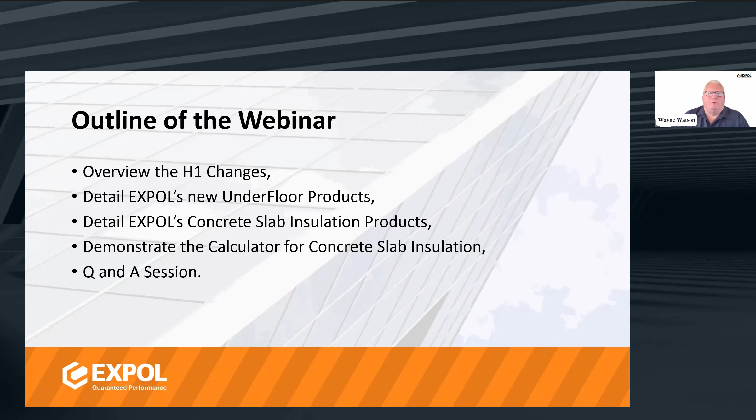Thanks, Wayne. Thanks, Cameron. Welcome, everybody, again. Going to be going through where we are at the moment with our current standards and the changes that are going to come through, which I'm sure you're all aware of.

So for wooden floors, we're at 1.3 for the entire country, and that applies to concrete floors as well at the moment, unless you've got heating in the floor. Of course, then you've got to have some insulation. So 1.3 across the board from one end of the country right to the other for concrete and timber floors as it stands today.

And those changes, of course, wooden floors for zones 1, 2, and 3 are going to go to 2.5. Zone 4 would be 2.8, and 5 and 6 are going to go to R3.

So the changes to our wooden floor product, which is currently at 60 millimeters thick and has an R value of 1.4 in the white product. And if we go to our premium product, which is the EXPOL Black, at R1.8 and also 60 mil. So that's going to change. Both products are going to change to 100 mil. The white product will go to R2.5 and the black product will go to R3.1. So for zones 1, 2, and 3, we'll use the 2.5, and zones 4, 5, and 6 would use the 3.1. We just kept it nice and simple and got 2 products.

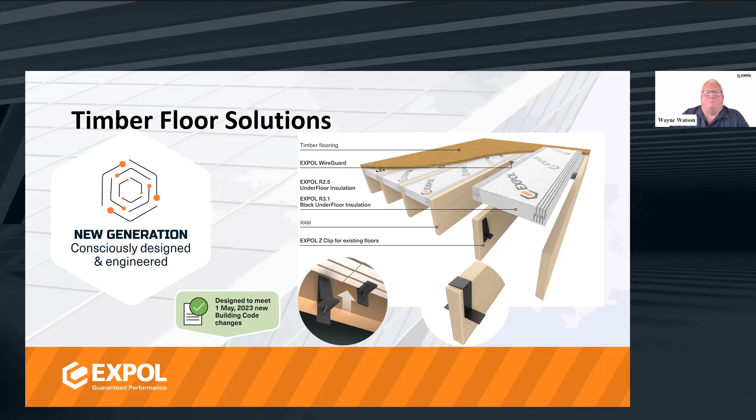That's pretty simple. Then going back, if we just go back to that table and look at slab on ground, or 3604 as I call it, or pod floors, where 1.5 for 1, 2, and 3. Zone 4 is also at 1.5, and 5 is 1.6, and then 6 is 1.7. That's not a lot of change from what it was before at 1.3, but of course the whole calculation method has been done differently now. And so there is quite a bit of extra insulation required as opposed to what there is now, which is at 1.3, none required at all.

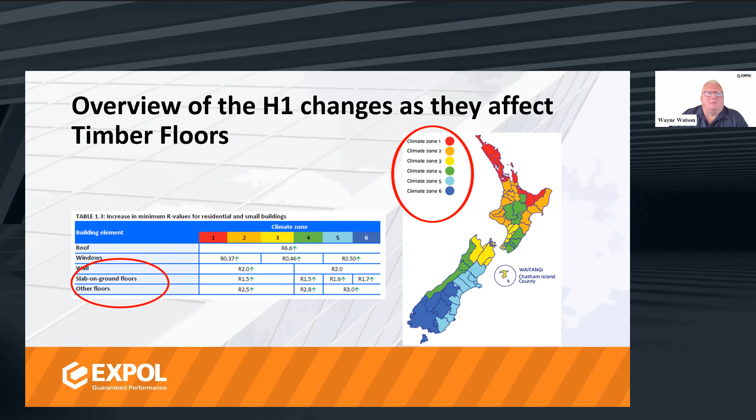So we'll move on to our concrete floor solutions. We've got a number of products that will work with concrete floors. First, we've got our edge insulation.

Some floors, whether it be a pod floor or a 3604, may be able to get away with just some edge insulation. So we've got XPS, which is an extruded polystyrene. It's an imported product, highly moisture resistant and ideal for the edge of a slab.

And then we've got a flashing, aluminium Z flashing, which fixes to the bottom plate, comes out over the edge of the edge insulation, and the exterior cladding can then come down. That's on a timber frame with a cavity batten cladding system.

If it was a brick veneer, you wouldn't probably bother with the flashing at all. The polystyrene, the XPS, doesn't come pre-finished, so that's got to be rendered, and that would just be rendered up to the first mortar line on your brick veneer. So that's our edge insulation.

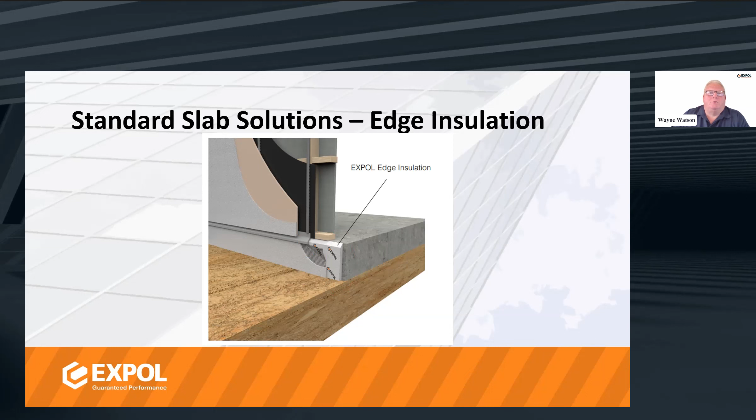We'll just clear those drawings, keep it nice and tidy, then go on to edge insulation and under slab insulation. So this is 3604. We've got our edge insulation in there again.

We've got our ThermaSlab product, which we would normally work with H grade. And then under the footings, we developed a product last year to take the place of XPS. It's an expensive product, imported and not always easy to get.

So we came up with SLABX200, has a rating of 200 kPa at 10% compression. We see that that's ideal for going under footings and under thickenings in conjunction with ThermaSlab, or you could just decide to put SLABX200 under the entire slab, whatever you decided to do there.

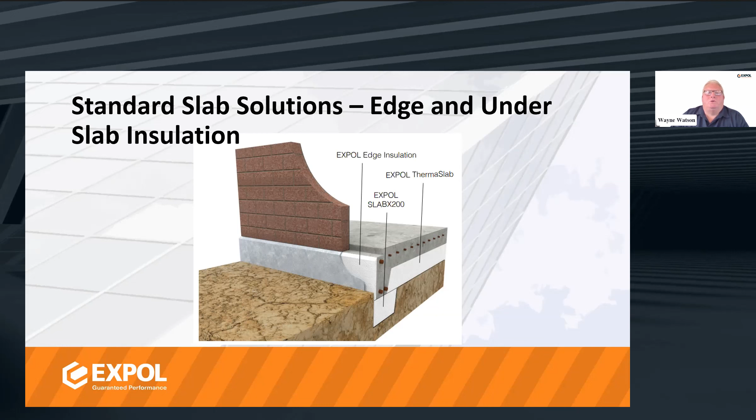Going on to our next floor. So EXPOL works with MaxRaft. There's lots of other options out there, but MaxRaft, we're working with them at the moment. We're producing all their product, and we thought that'd be a good example to show everybody the three options that we've picked out of their portfolio.

Looking at that, so they've got edge insulation, but it's an L shape. It is unique to MaxRaft, and that's this fella here. So that's an L shape, made out of a very high density polystyrene.

This MaxRaft option uses pods that can use our normal waffle, hollow, non-structural pods, or it could use solid pods if they're trying to boost the insulation up. Here you'll see there's the ribs that the pods create, that the concrete floor is sitting on, on the ribs, the edge beam and any thickenings throughout the floor. And of course, that's the primary purpose of pods, and that's to create the ribs.

But of course, with polystyrene, it's insulation material. It adds insulation to the slabs, now more important than ever before. I'll just clear that, and I'll go through to MaxRaft.

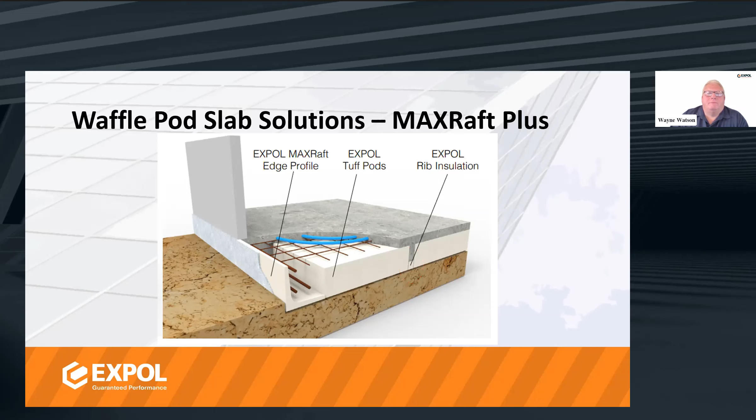The other option that we've picked is MAXSlab. So this is a little bit different, it's not a pod floor. It's very close to 3604, and we've used that same edge profile again that we had before.

That fella there, made out of that high density insulation again, high density polystyrene. And then we've got here the sheet insulation, sheet polystyrene, high density again, under the entire slab. So that also is totally encapsulated, heat can't escape at all.

And of course you can see there, it's a heated slab. It's got some water pipes running through that's going to heat the slab. So those are the 3 options that we picked, or 5 options that we've got. We've got more, but those are the ones we picked out to put to this presentation.

I'll just quickly clear that if we move on, otherwise it'll be there when I do the next session.

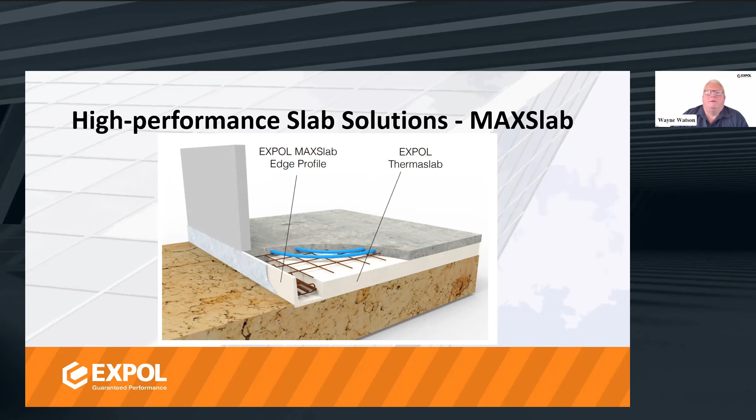So as you're probably all aware, there's a calculation now, square meterage to perimeter, and that's going to determine how you arrive at the insulation value that you need for the design that you've done, whether it be a small box house or an extravagant mansion. They're all going to have that calculation done to work out what you need.

So what we'll do is go into our calculator that we've put on our website. This is going to give us our perimeter to square meterage area. I'm just going to put in 250 square meters, edge perimeter 95, it's pretty high, and let's say we need an R value of 1.8, and then we'll calculate that.

And that's brought up 3 options. So standard slab on grade 3604, you could use 80mm EXPOL Platinum board at R2.1.

You can use a waffle slab system, EXPOL MaxRaft Max 85, which will give you 1.8, or you could opt to go for a high performance option, the EXPOL MAXSlab at 3.2. So you can hop in there and have a play with it and see what works for the designs that you guys are doing.